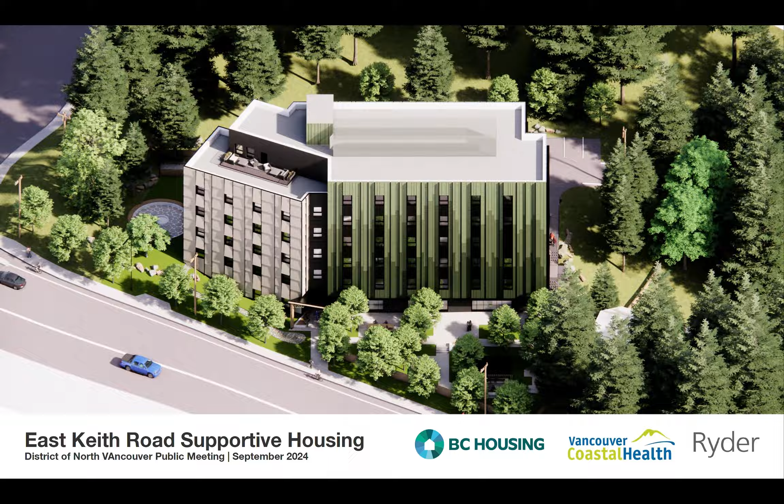We would like to acknowledge that the project is situated within the unceded traditional and ancestral territories of the Squamish and Tsleil-Waututh people, adjacent to what is now referred to as the Burrard Inlet.

As a supportive housing multifamily project, we have identified 6 key goals for the building: provide residents with a safe space to heal, offer space to foster and build community, allow opportunity to age in place through increased adaptability and accessibility, deliver a high-performance building for increased climate resilience, develop opportunities for increased level of livability and well-being, and enhance connections to nature and the surrounding environment.

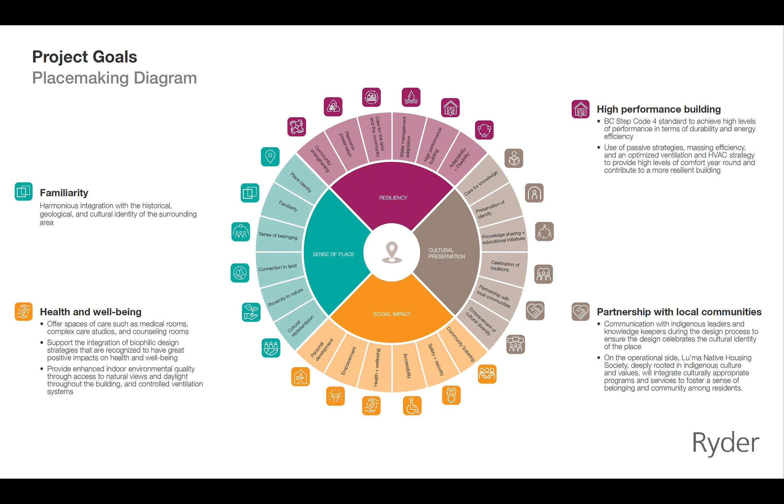Additionally, working alongside local Indigenous communities and housing operators, we have developed an approach in assisting residents and the community in placemaking, cultural preservation, social impact, and resiliency.

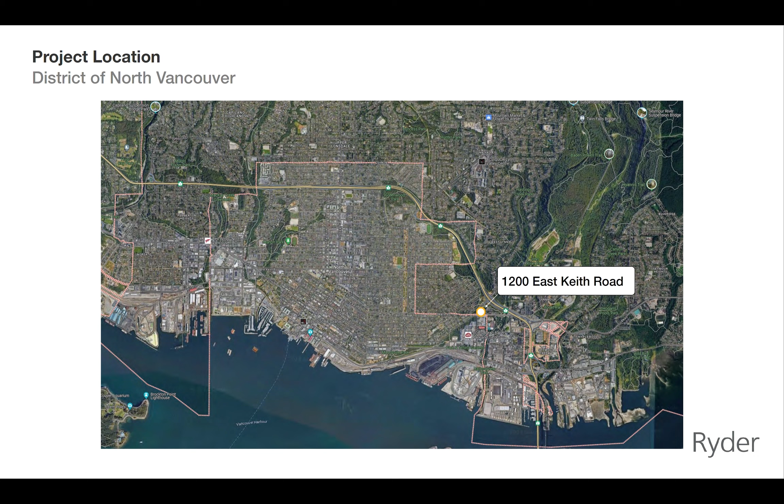The project is located at 1200 East Keith Road at the intersection of East Keith Road and Mountain Highway, along the municipal boundary between the City of North Vancouver and the District of North Vancouver.

The site is located within the Lower Lynn Town Centre and identified as residential level 5 low-density apartments, permitting up to 1.75 FSR in the District of North Van official community plan.

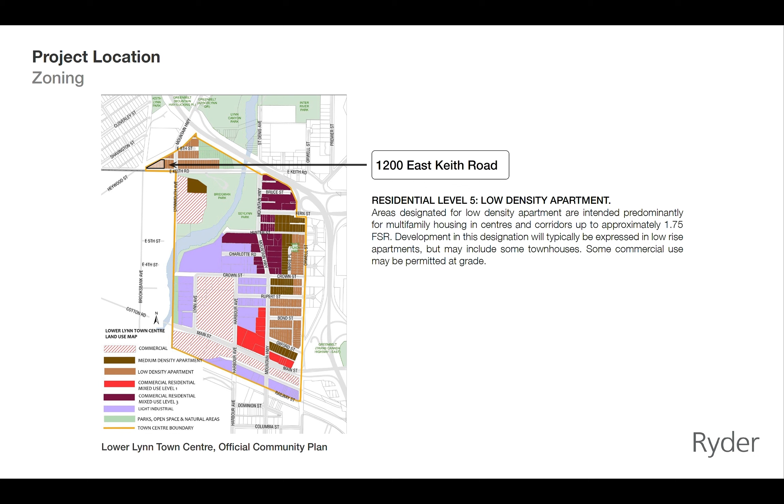In February of 2024, the site was successfully rezoned to accommodate a 6-story multifamily supportive housing project with up to 1.75 FSR.

The site offers a variety of unique characteristics, constraints, and opportunities. Presently a vacant site with no existing structures, the site exhibits a steep slope on its northern edge. This slope offers opportunities for views to the south with lots of exposure to direct sunlight.

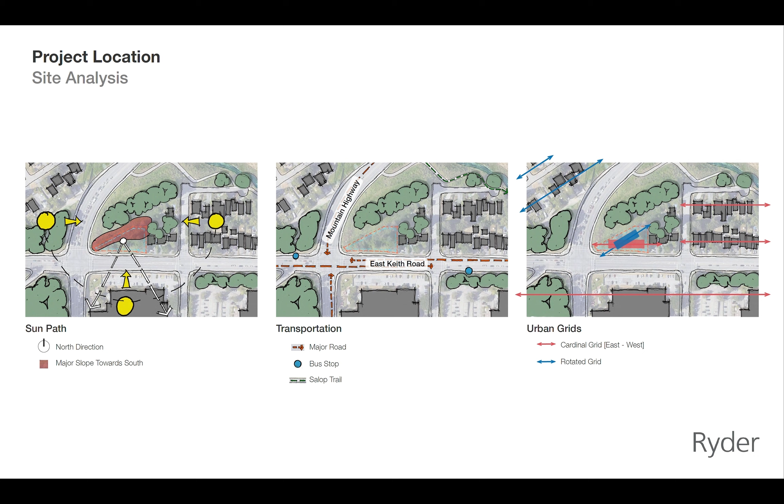The property is well connected to the existing transportation network, with convenient access to arterial highways, intercity trail networks via the Salop Trail, and bus lines that include Bus Route 210, which offers connections to the Phibbs Exchange and downtown Vancouver. The site is also uniquely positioned between 2 urban grid orientations, a traditional east-west cardinal grid and a rotated grid which responds to the local topography.

The building is shaped by these 2 intersecting grids and the local topography. It provides opportunities for common outdoor amenity space and ceremonial space, with increased connectivity between the interior and outdoor spaces.

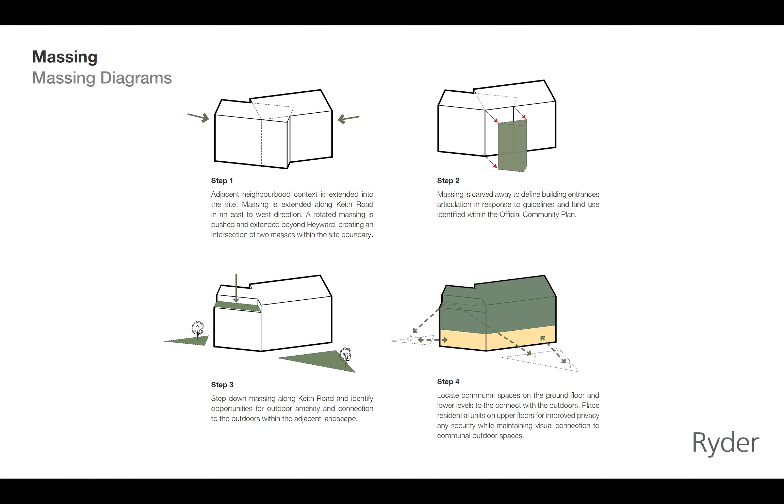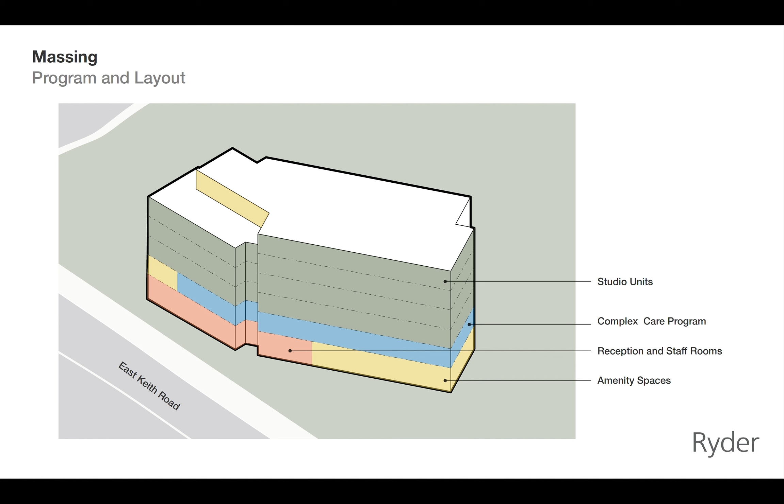On the ground floor, common dining, common amenity, and staff spaces connect residents and users to the adjacent outdoor amenity spaces and the public realm. Residential complex care housing and additional support spaces are located on level 2, with residential supportive housing located on levels 3 and above.

Located at the western edge of the city block, the site is bounded by East Keith Road to the south, Mountain Highway to the west, and an unused District of North Vancouver road allowance to the north. To the east, there are 5 single-family home lots with the same residential level 5 low-density apartment designation under the official community plan.

The building's principal entrance is located along East Keith Road. This entrance will be the main entrance for residents, staff, and visitors. Deliveries and other vehicular access, including parking, will be provided from Lynnmouth Avenue via a proposed lane which will utilize the existing District of North Vancouver road allowance. 15 parking stalls are provided for staff and visitor use.

A secondary entrance into the building is proposed along the north side to accommodate those who may be arriving by vehicle.

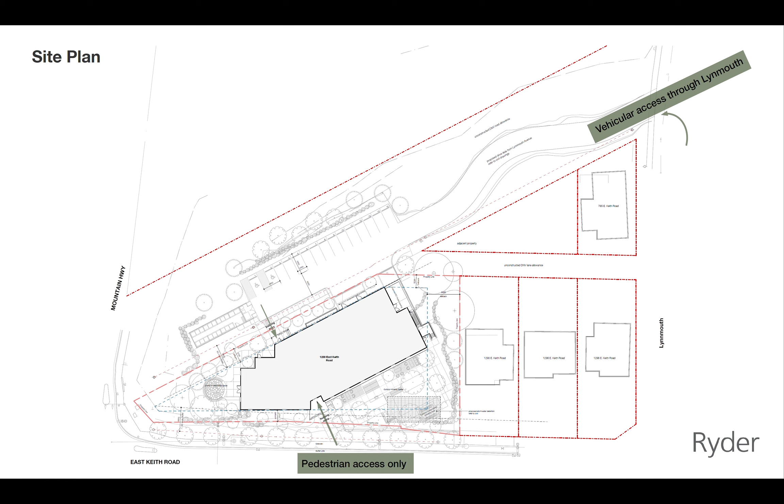Landscaping around the building provides a variety of outdoor amenity uses. In the northwest corner adjacent to the parking stalls, urban agriculture plots are provided for residents to grow their own fruits, vegetables, and other indigenous plants and/or medicines. To the west, a circular outdoor ceremonial and gathering space is proposed for residents to use throughout the year. Along the south, a rain and rock garden is proposed to collect and permeate rainwater during heavy rainfall events.

The main entrance provides barrier-free access to and from the public realm, with covered bicycle parking and increased weather protection. In the southeast is a large communal outdoor amenity space that is provided for residents. This space proposes a variety of uses, including outdoor dining, lounges, seating nooks, and a lawn space. Traditional plant species are proposed throughout this space to promote cultural awareness and practices. Along the eastern property line, additional rock gardens are proposed to support the existing topography and facilitate the retention.

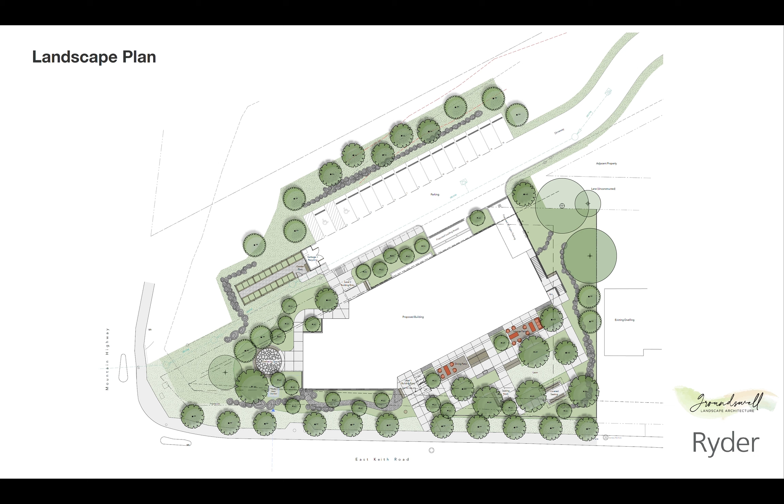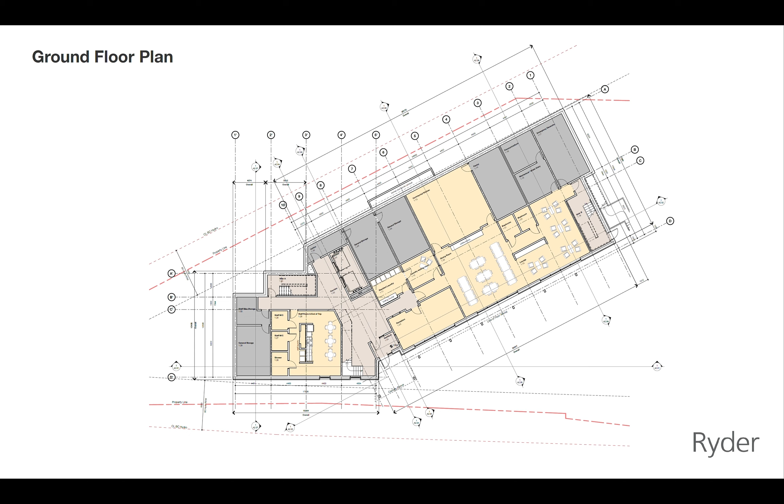The principal entrance is located along East Keith Road at the midpoint of the property. Along the south edge of the building are common amenity dining spaces that offer connections to the adjacent outdoor amenity spaces. A commercial kitchen, storage, and other service spaces are located along the northern edge, nestled into the sloping topography. Staff and reception spaces located on either side of the principal entrance provide additional levels of security and occupant safety.

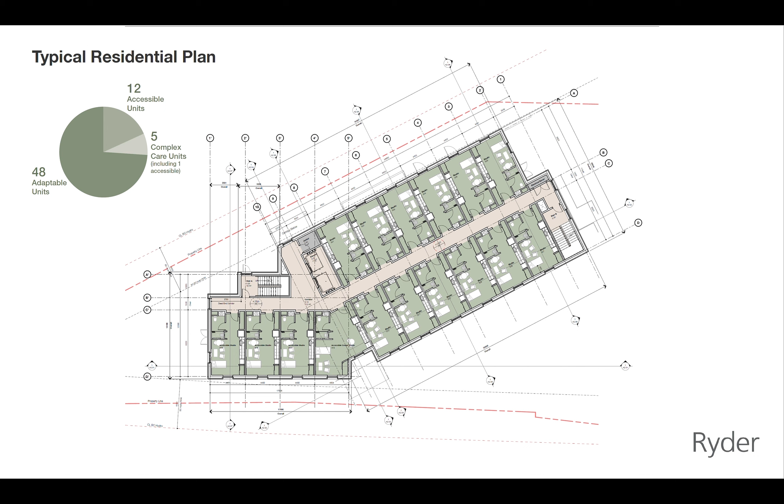A typical residential floor is made up of a combination of accessible and adaptable units. Increased corridor widths, a minimum of 5 feet wide, provide an enhanced level of accessibility throughout the building. Each studio unit is approximately 365 square feet.

The building's facade and material palette is inspired by natural elements found on the North Shore and the indigenous use of the cedar tree. The building embodies the essence of the cedar tree in various states, from its vibrant living state within the forest to its harvested material.

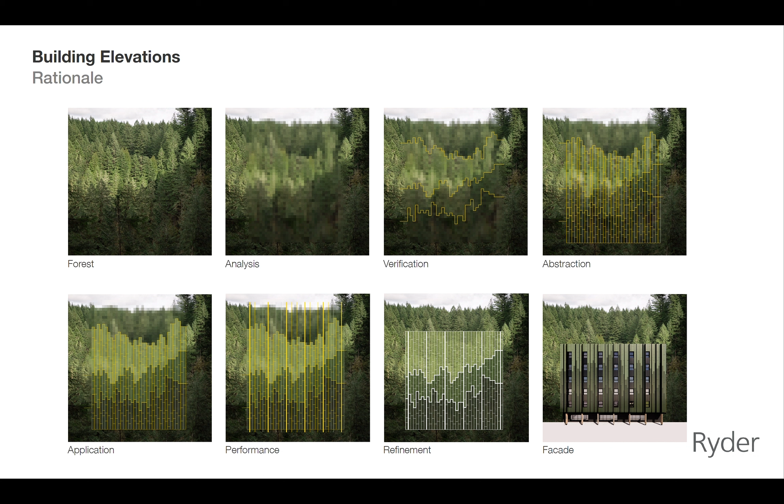Through the use of color and vertical shading, the building's facade abstracts these elements of the forest. The western half of the building draws further inspiration from harvested cedar and its indigenous use, abstracting patterns and arrangements from traditional indigenous longhouse architecture. The proposed design reintroduces these patterns and traditional elements in an effort to promote and preserve cultural identity for the local and urban indigenous communities.

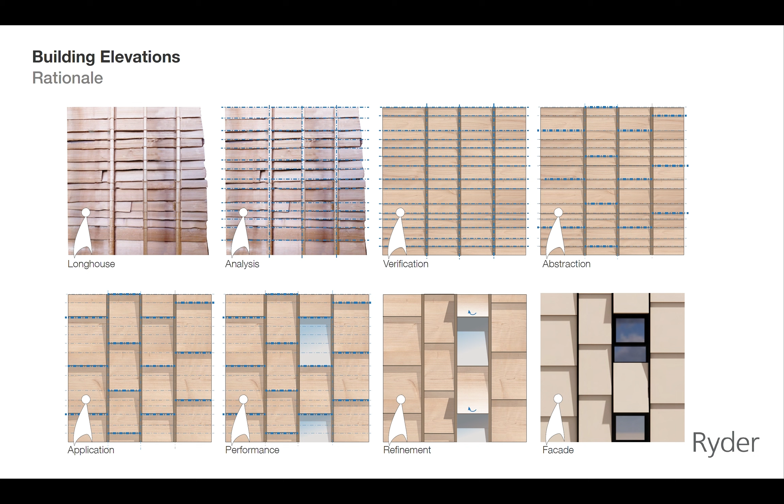This is a view of the proposed building looking northeast along East Keith Road. From this view, we can see the southwest corner of the building and its reinterpreted longhouse facade within the surrounding context.

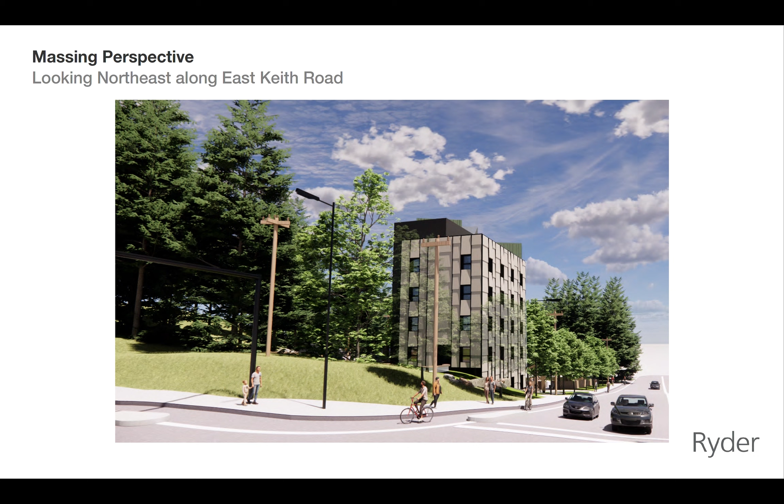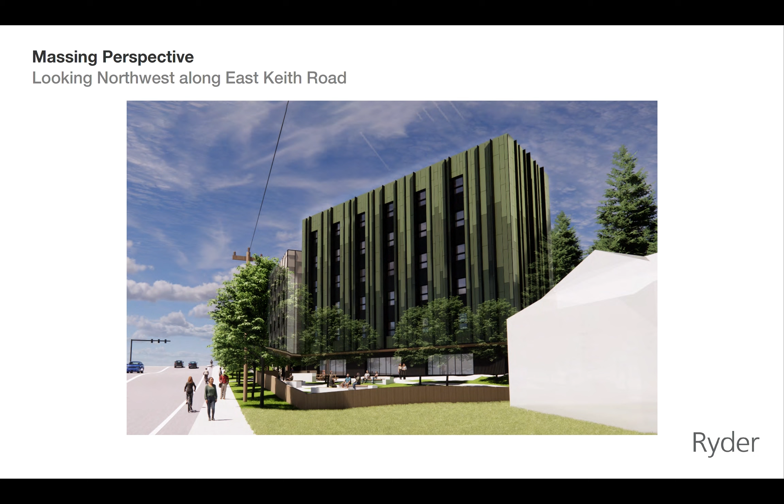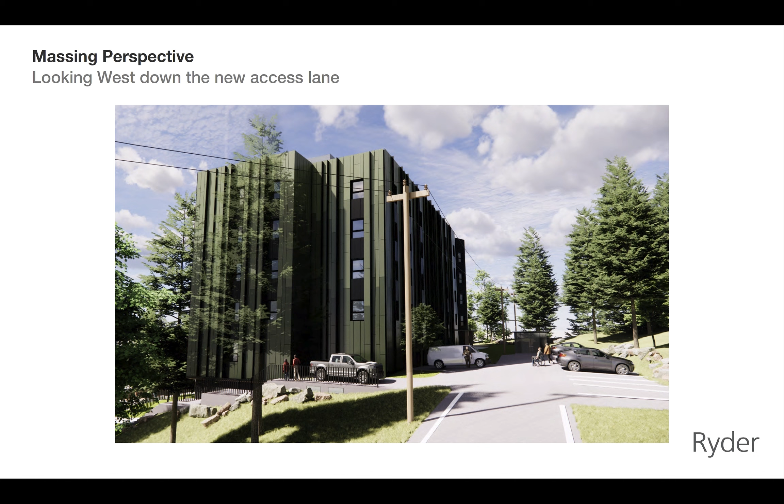Similarly, looking northwest along East Keith Road, this view shows the forest-inspired facade as it relates to the proposed outdoor amenity spaces. This view from the proposed laneway looks west and shows the relationship of the building, the existing slope, the proposed parking area, and the surrounding trees located within the District of North Vancouver Lane Allowance.

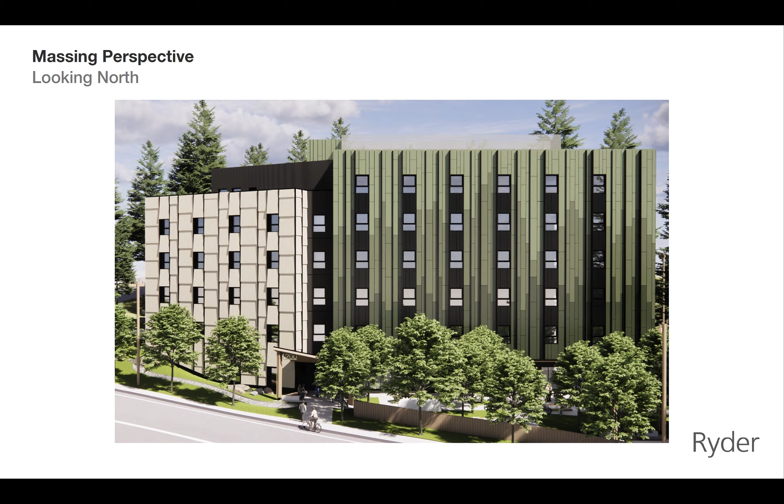This overall perspective of the project looking north shows the two facade treatments and their relationship to one another within the site context. Thank you for attending our virtual public information session for 1200 East Keith Road.